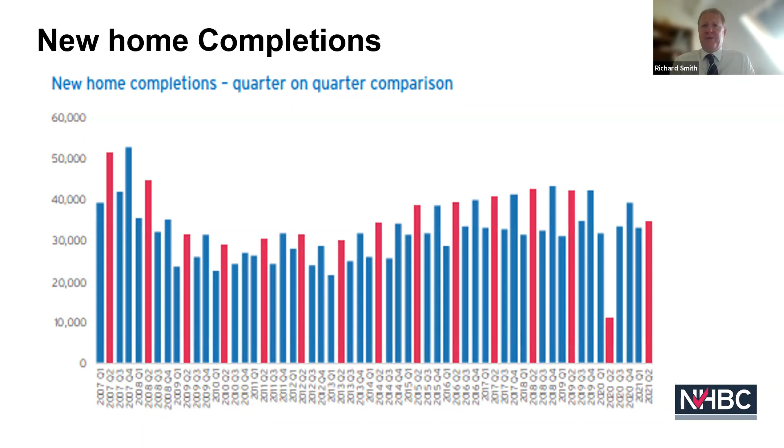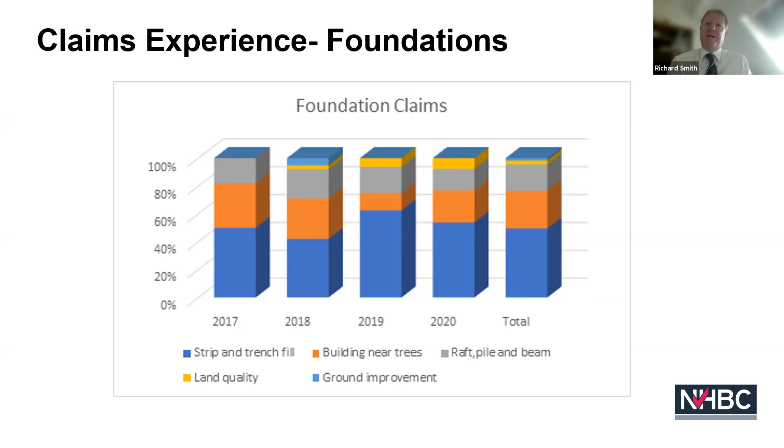But if we just move on to the next slide, I'd like to spend more time talking about our claims and our claims experience with buildings. Thankfully, I can say we don't seem to have a significant claims loss with foundations and foundation systems, but we still get some claims. Statistically, splitting this down between 2017 and 2020, most of our claims come from strip and trench fill foundations or building near trees. We do receive some claims on raft, pile and beam systems, land quality, and ground improvement, but they are very, very few and far between. So it's the traditional building systems or foundation systems, and also building near trees, where we actually receive the notifications. Just to say these are notifications we've received rather than actual costs. If we move on to the next slide, we'll now talk about costs.

So if you remember on the last slide, we looked at strip and trench fill foundations as being the largest notifier of claims. But from a cost point of view, building near trees and remediating those issues is probably more expensive over that same time period. Just to clarify, that's down to the fact that the foundation systems are more complex and probably more complex to resolve, whereas an issue with a strip and trench fill foundation may not always necessarily rely on an underpinning solution. A solution for remediating foundations near trees may include a pile raft reinforcement type system, which obviously increases the cost significantly. Just to also mention, in recent claims we've seen a good example where the foundation depths were what we would deem adequate, but the heave protection was missing, so there was potentially a risk of heave in that building. But generally what we see is that our standards in relation to building near trees, if done correctly, are appropriate for the risk.

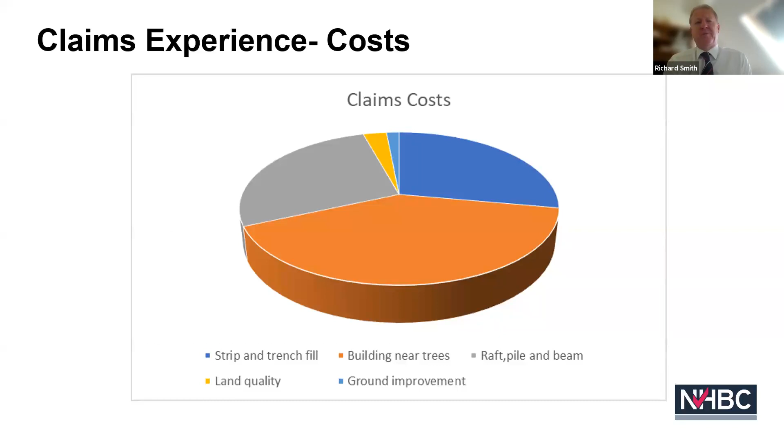It's something that we want to look at as we move forward. So if we move on to the next slide.

So just to talk about what we are doing at NHBC to look at foundations. For a start off, we are committed to supporting changes to prevent further climate change and resilience to climate change.

We have previously produced an NHBC Foundation publication on designing efficient piling systems for low-rise housing, and that was done a number of years ago now.

What we have agreed to do now is we have commissioned a new NHBC Foundation publication to look at the effects of climate change and how that will affect foundations in the future.

We've started on that. That will involve a technical review, which, if anyone is interested, please contact me, and we can put that over to our authors, and we can get that out.

But I think getting the information across to actually do the survey so we can find out the scale and develop that would be really good.

From there, the idea would be that we look at what that foundation report is telling us, to see how we are going to put in future standards for NHBC to support climate change, and look at how we can improve our resilience to climate change and risk of movement within foundation systems.

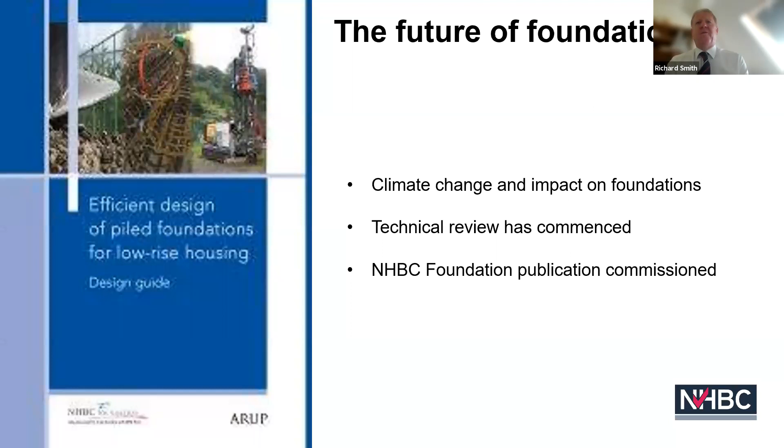So as we move on to the next slide, as part of our climate change agenda, we recognise that more trees will be planted on sites.

And we support that. I think it's very clear to say that we support that, and we recognise that that is part of a good sustainability agenda.

We also recognise that some local authorities, High Wycombe for example, are already starting to put planning conditions in about the percentage of tree canopy on building sites.

But that also represents a risk to NHBC. And with respect to that, we have to look at how we are resilient to that risk.

So rather than NHBC saying that we do not support trees, additional trees and tree canopies or enlarged tree canopies going on sites, what we'd sooner do is work with the industry to look at how we can mitigate that risk and reduce the potential risk of buildings becoming at risk of subsidence.

Based on the fact there are more trees there, we have offered some support to the Trees and Design Action Group, and we are happy to contribute to their technical publications. We have contributed some financial support on that as well.

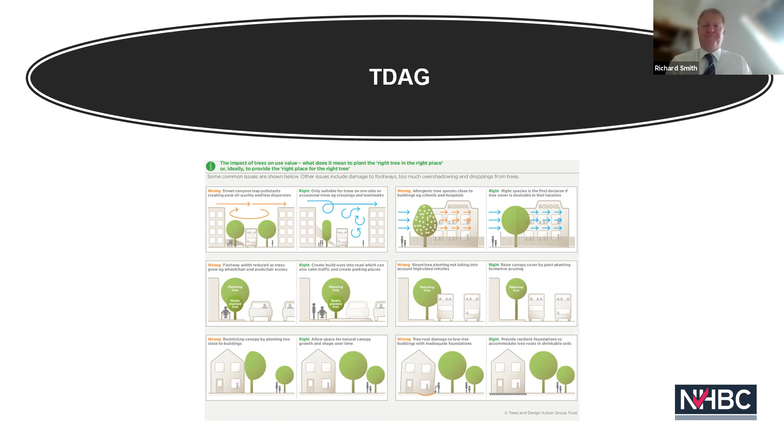Next slide, please. So probably one of the most interesting areas for today is the foundation depth calculator. We don't have any immediate plans to change the foundation depth calculator as of today.

But hopefully you can see that with the research we're doing as part of our NHBC Foundation publication and the work we're doing with TDAG, one of the outcomes would be that we look at our standards in general terms, chapter 4.2, and look at whether we need to make changes to improve our resilience as we move forward, especially with climate change.

We recognise that shrinkability or plasticity of clay varies significantly throughout the UK. The south and southeast are more at risk of shrinkage and movement in the clay.

But we also recognise that with potentially dry summers and wetter winters, the research we want to carry out hopefully will tell us what impact that will have on potential foundation systems.

And the other thing we need to look at is the fact that at NHBC, we need to consider the embodied carbon of foundation systems.

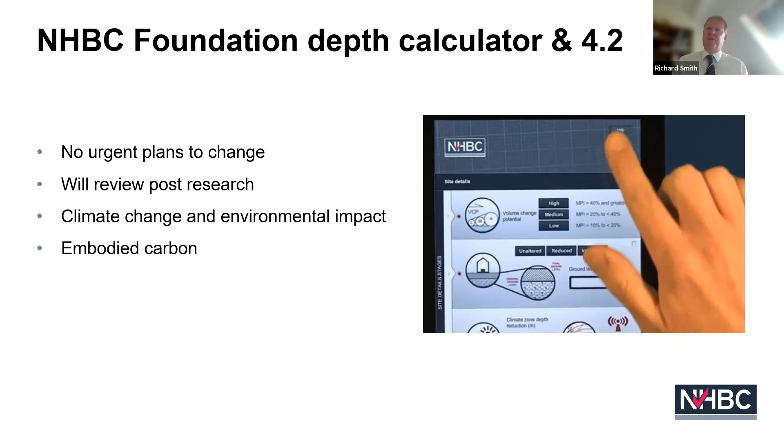Moving on to the next slide. The key thing for me is we haven't really had, in my experience, much of a relationship with the Subsidence Forum, and that's why I'm glad I'm here. But we do recognise that NHBC Standard 4.2 is used for remediation schemes and underpinning schemes. I'd say here that NHBC Standard 4.2 is a standard to demonstrate compliance with NHBC requirements for new build housing. It was never produced or prepared for anything wider than that, as far as I'm aware.

But we do recognise that it's used by the wider industry. From an NHBC point of view, I've got to make it clear that I don't think that was ever the intention, and our priority will always be to create a standard for providing resilience to potential claims and consumer experience in new build housing.

So what I would say though is that I am happy for the Subsidence Forum to be involved in any future committees we set up in relation to developing future standards with respect to foundations, particularly standard 4.2 and foundations near trees. So that's probably an open invite to the Subsidence Forum to get involved, and I'm more than happy to obtain feedback from the Subsidence Forum to help develop a good standard.

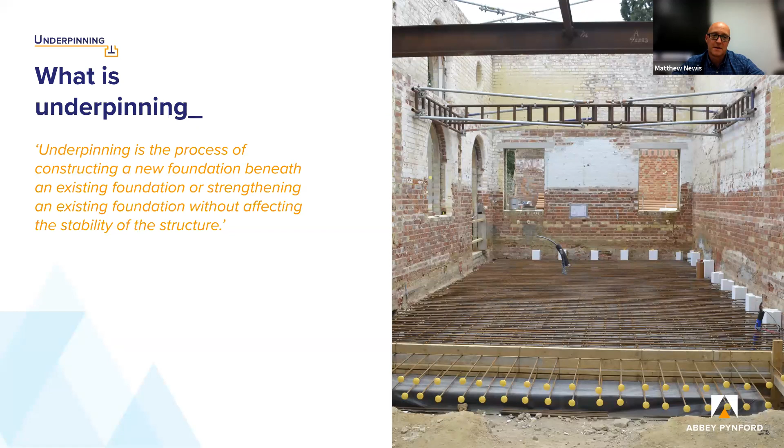Construction of piled raft. We often get asked, what are you actually doing to our house? We have a basic description: in simple terms, we're putting a building on a concrete table, which is the raft slab, with concrete or steel legs. That gives the owner a picture of what we're doing. It's most appropriate for whole buildings or extensions if we can - it's good to pick up a whole building.

It's more cost effective than traditional underpinning, and the raft slab also doubles up as a new floor structure. We can use it for anti-heave, and it's easier to adapt and adjust. The downside, to be honest, is the disturbance - the whole inside of the property gets stripped out, so the property needs to be vacated when we carry out the works.

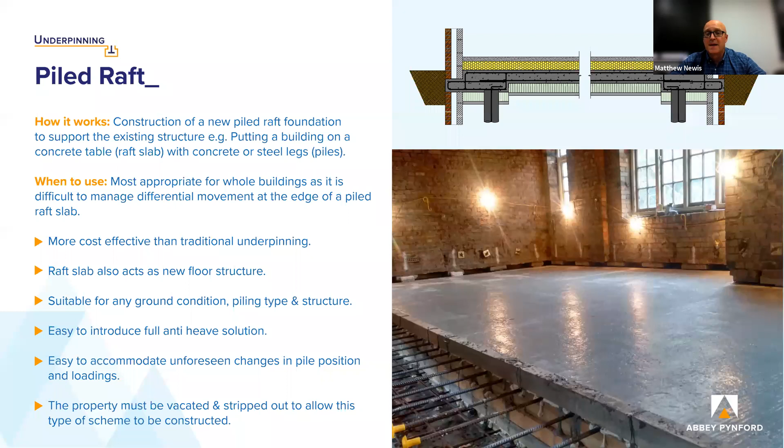I'm going to run through the process. Generally, we work alongside a general building contractor who will strip out the property and protect it. They'll take out all the fixtures and fittings on the ground floor. Sometimes, if there's something that needs to be kept, we'll work around it and build underneath it, but ideally the whole ground floor gets stripped out, including non-load bearing partitions, and the existing floor gets removed and reduced - sometimes undertaken by the main contractor, or sometimes ourselves.

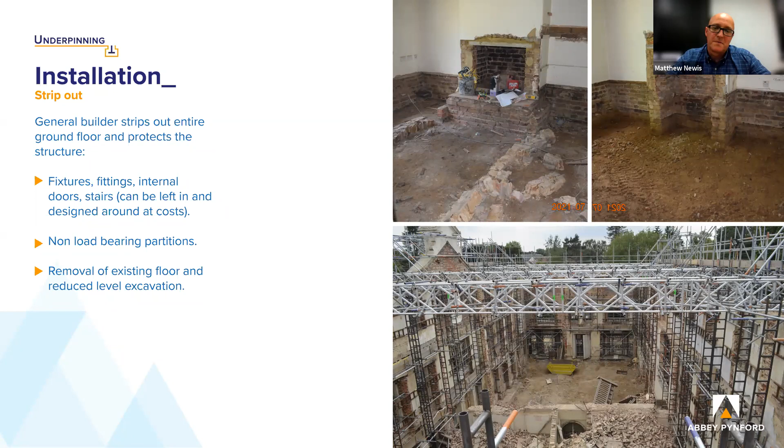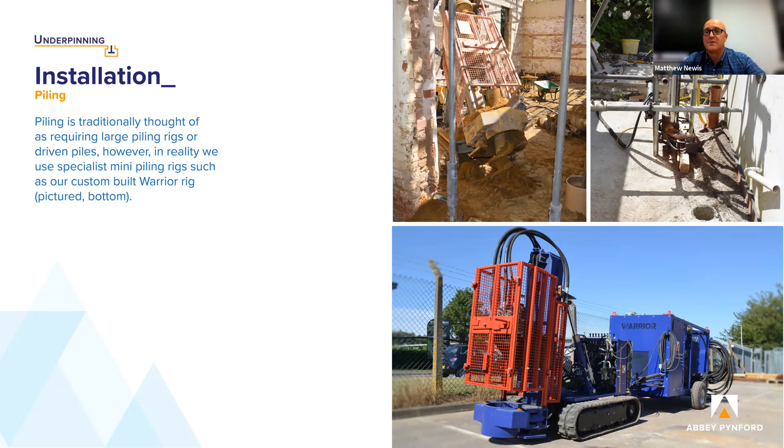The first thing we carry out generally is the piling. When you talk to people about piling, everyone thinks about the big piling rigs you see on open sites. The first question I get asked by the homeowner is, how do you get one of them into our house? What we do is bring in a much more scaled down version, similar to the rigs in the pictures there, or similar bits of kit. There are two pictures showing augered rigs, and in the top right hand corner there's a handheld kit set on scaffold to install micropiles, which I'll talk about later.

Here are pictures of piles installed at different stages. Usually the pile comes out just above ground level - we use cardboard sleeves to build them up, and the reinforcement projects out the top, which is then bent down and put into the raft slab.

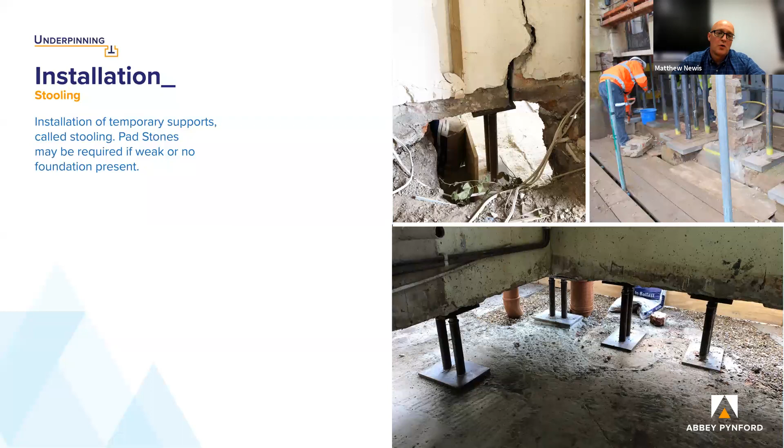Once all the piles are installed, we'll support the building on temporary stools. These continue to support the building through the existing foundation whilst the raft slab's installed. On some occasions, the foundation might not be deep enough for us to stool off of it, so we may insert temporary foundations below or use pad stones.

Once it's stooled up, we'll put the blinding in - usually sand or concrete. Concrete's used if we've got no anti-heave precautions, or if we're using polystyrene products such as Pecafil or Cellcore. Sand is generally used if we're using collapsible materials such as Heave Guard or Clayboard.

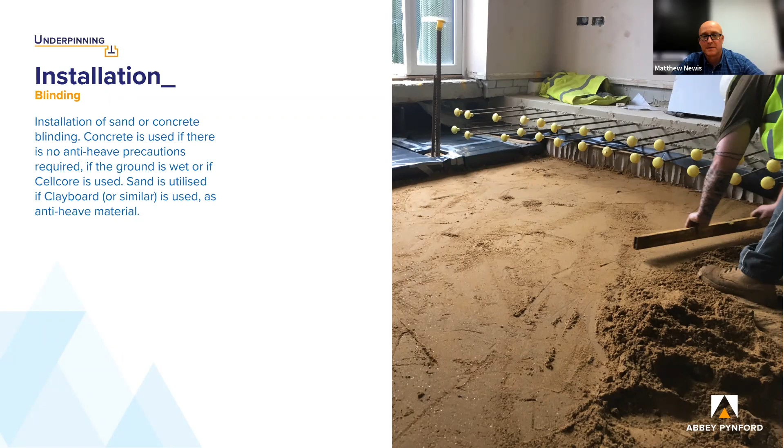Depending on what we're using, the Clayboard material is actually made out of cardboard. We wrap it up in its dry state, all wrapped up, and it can support up to a metre's worth of concrete above it. We install that, install the concrete, and afterwards introduce water into it, which allows it to collapse and create a heave void underneath. The polystyrene products work slightly differently - they are compressible, and if the ground heaves, they're designed to compress. They require the pile connections to be a lot stronger, and the piles are designed accordingly to resist that uplift.

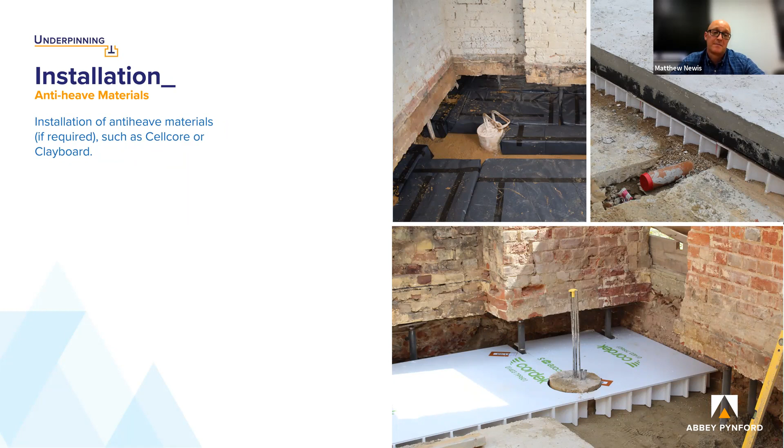Once we've got the anti-heave in, we'll install the reinforcement. The reinforcement is placed in, and then prior to concreting, we'll have quality control checks, generally by our contracts managers, by building control, potentially checking engineers or the clerk of works. As we're members of ASUC, we'll also potentially have design engineers that check on behalf of ASUC to come in and have a look as well.

Once we've got the reinforcement ready, we'll pour the concrete. Generally we need access to either get a concrete lorry up to the site or we'll pump it. Once the concrete's all installed, we'll allow it to go off.

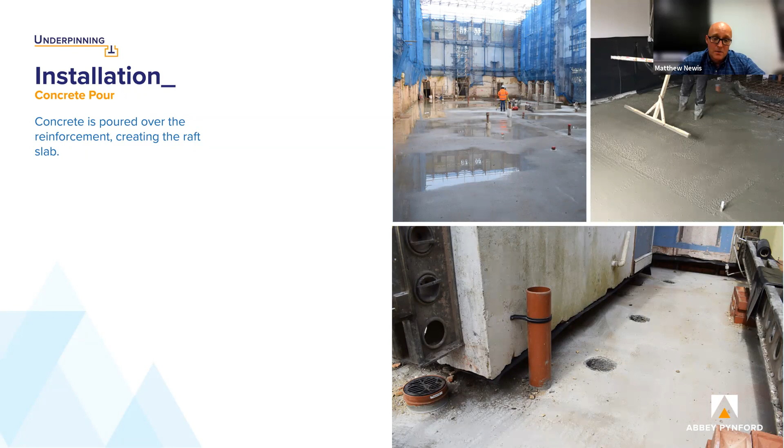We'll allow the concrete to go off, and then after 7 days we'll look at whether we need to take the temporary stools out. So we take the stools out and the holes are made good. In the process of removing the stools, we have further quality checks to make sure they've all been removed, and then the building at that stage is separated from the existing foundation.

On some occasions we may need some bricking up done, as in the lower picture. So the slab's installed. Before we take the stools out, we'll either dry pack the gap between the existing structure and our slab, or if it's over 75 millimeters, we'll get it bricked up.

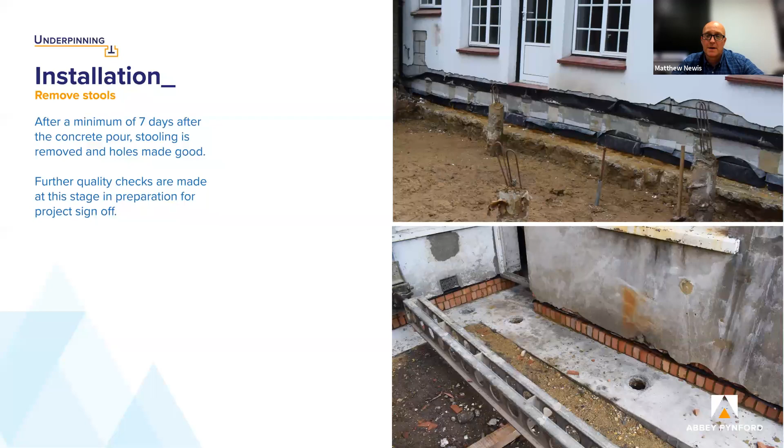I've got a couple of case studies. The first one, on the next page, is a large property that we did in North London. This property had been previously underpinned and piled, but was still moving quite considerably.

So we prepared and provided quite a detailed scheme that had some quite complex temporary works, which allowed us to take out sections of the existing scheme so we could put a whole new scheme in.

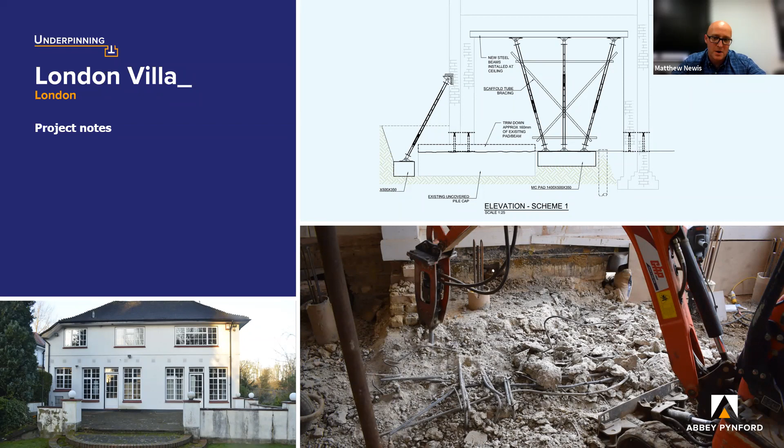The piling rigs, as I said, are designed to go in the building. As you can see here, they'll fit through doorways, they'll fit through a domestic doorway. By the time the floor's removed, they've got sufficient height to operate without damaging the ceiling, etc.

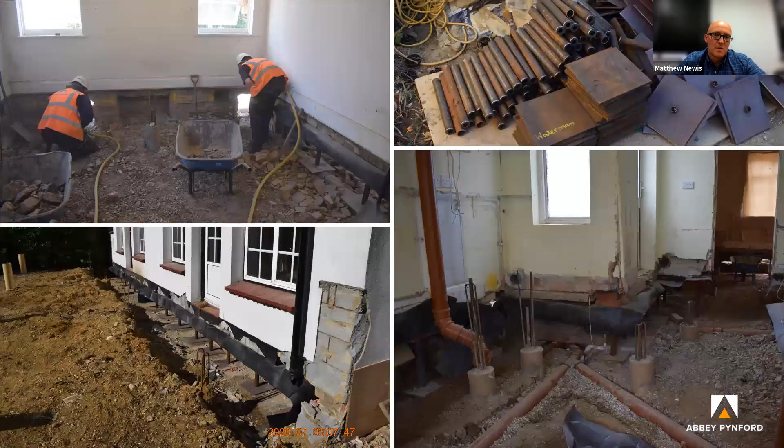As they work through, the guys then stool up the building, breaking out bits of the existing structure and putting it all on the temporary stools. Sometimes we have to take the drainage out and put it back in again, depending where the piles are going, and on another occasion it might need to be moved or combined within the actual scheme that we're installing.

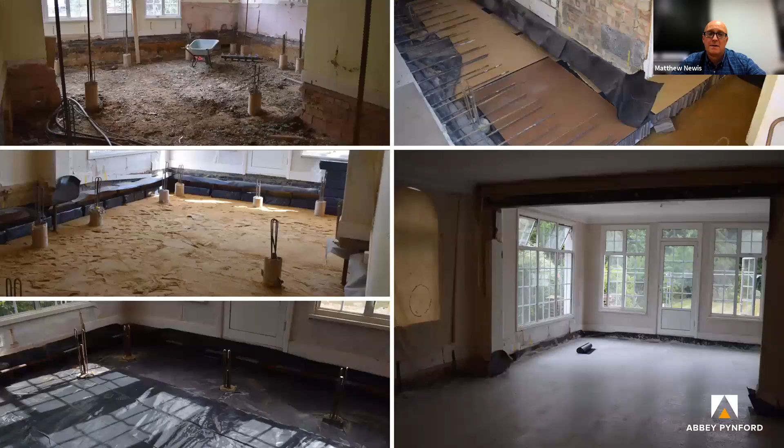As we progress through the works, piles are installed, then the blinding, the anti-heave precautions all wrapped up, and then the slab is finally installed. That was a traditional scheme we did, which was down to clay shrinkage.

This project was a new build property that we had to go in and pile. It was timber frame, so that threw up its own issues regarding how to support the timber frame. We came up with quite a novel approach, and we installed lintels underneath that entire frame with our props to ensure the loads weren't point loads being put into the sole plate.

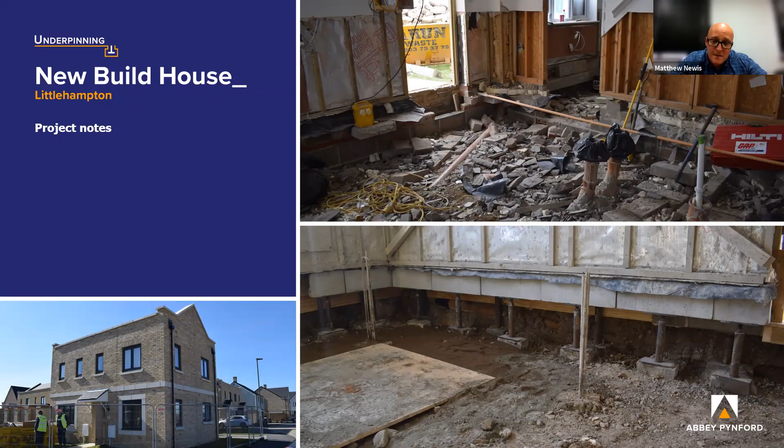On this scheme it was a non-voided scheme, so we didn't have to put the anti-heave precautions in. So the stools actually get cast in and are sacrificial.

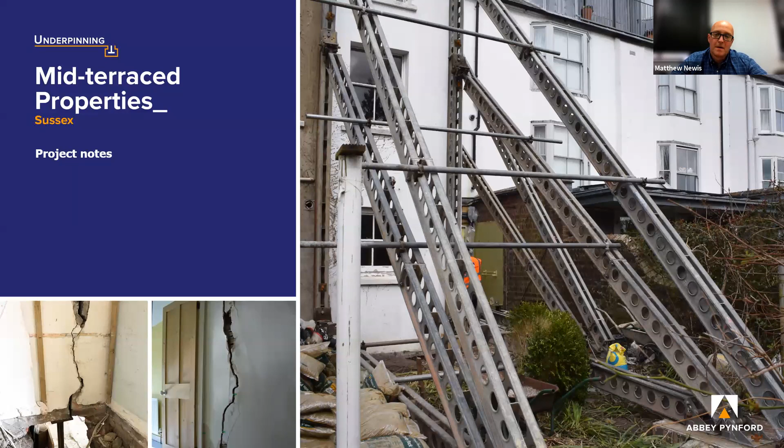We actually stooled the slab up, stooled the building up off of pad stones and off temporary pads, and then installed the raft slab first. Because the property had such a shallow nominal footing, we put the whole raft slab in first, and we left openings in the slab to allow us to install the piles afterwards.

Okay, go to the next page. This is a slightly different project for us.

This was for a house builder where we stabilised not only the existing structures, we also installed pile rafts for new foundations over some of the buildings. It shows that we can do not only single storey, two-storey standard domestic properties, but we can engineer to take up much larger structures. So we underpinned not only the manor house here, we underpinned the stable block and the clock tower as well, using similar techniques, just with thicker slabs, larger diameter piles, and more comprehensive stooling techniques.

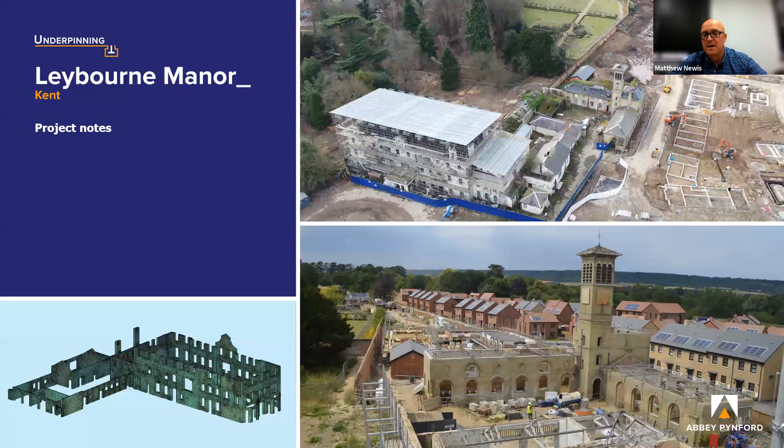So we picked up the manor house, which is in the bottom left-hand corner. We picked up the stable blocks, and we picked up the clock tower with pile rafts. We also did some facade retention and mass concrete underpinning to the listed wall at the rear. And the new homes at the back of the site, we also put in our HouseDeck system, which is a piled raft for new build properties.

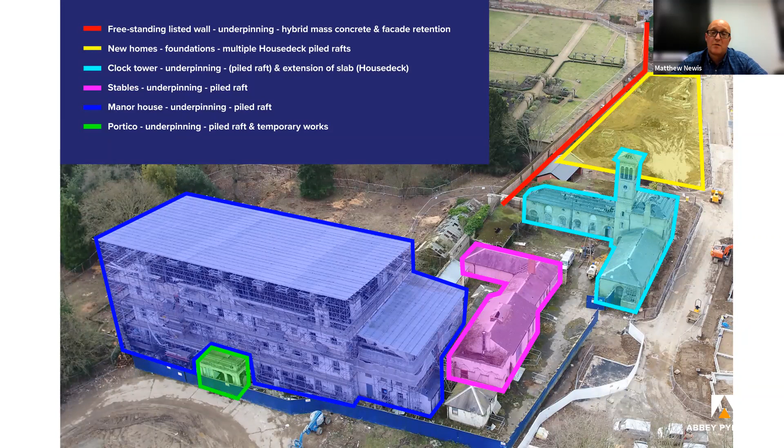So in the manor house, we stooled it up. We put quite comprehensive stools into some of the areas, which comprise large steel sections on temporary pad stones. The main contractor did quite a lot of temporary propping to hold the structure in place.

And as we carry on, we picked up the clock tower. This was a very large, heavily loaded structure. But our design team did FE modelling on it, looked at it, and came up with a solution that worked, that provided the house builder with a new foundation, so they could convert this.

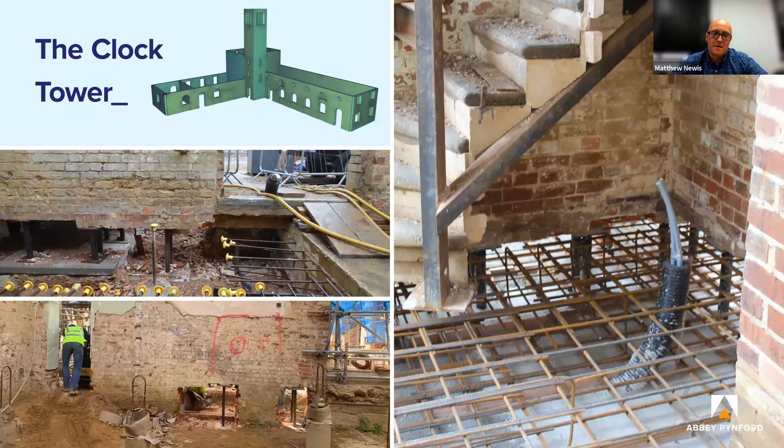So we carry out a lot of our own designs. Piling has come a long way in the last 15 years. Before, piling rigs didn't have the big red cage that you see there on the front, whereas now we do. It makes it more difficult in terms of where we put our piles. Doesn't mean we always have to have that guard on there, there are ways of working around it, but we have to make exclusion zones. Predominantly what it's done is made it so we can't work as close to the building as we used to, so we've had to redevelop our designs and reconsider what we do.

What you'll find is most underpinners design and install their underpinning their own way, they all have little nuances. Quite a lot of the time, clients go out to engineers to get these designed first. Generally, if you don't involve an underpinning contractor that knows how close you can put the piling rig and what the problems are going to be, the scheme ends up getting adapted and redesigned at that stage. So a lot of our work we do on a design and build basis - people come to us with a performance specification and we work to that. I think a lot of the time, if the engineers don't involve us, you could spend quite a bit of money that's going to then need to be redesigned anyway.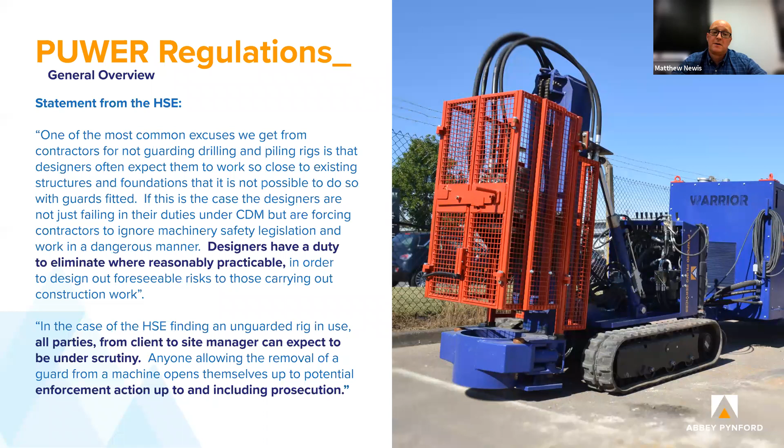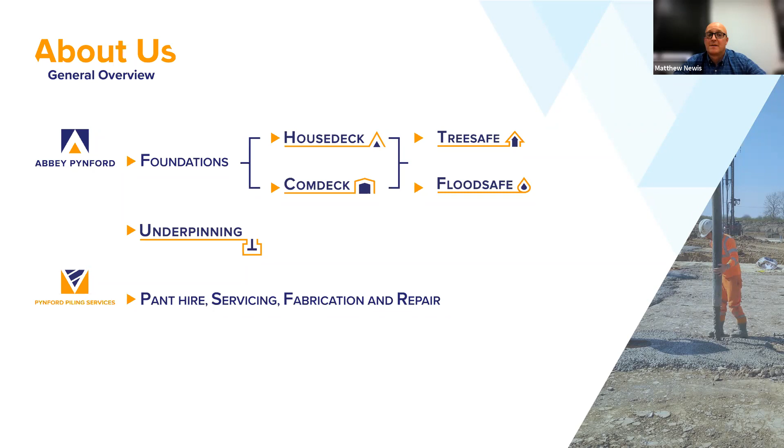We're IMS accredited, our systems are BBA and LABC certified. We have CHAS and SMAS accredited Constructionline, and our systems are NHBC and Premier Warranty approved systems - that's generally our house foundation systems.

We've worked for a lot of people. We do a lot of insurance work, and a lot of work for house builders and their ground workers. We get involved with as much as we can. We have our in-house design teams, so we do all our work in-house, including FE modeling - we've done some quite complicated and detailed things in the past. We use a lot of 2D and 3D software, like SOFiSTiK, to do our designs.

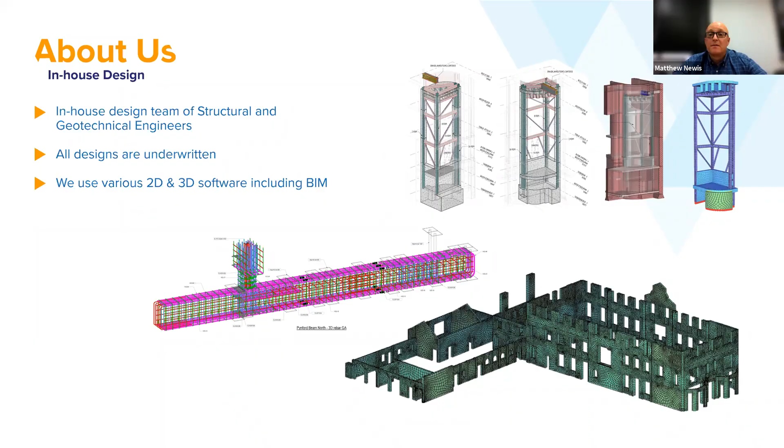So that's the end, thank you very much. I'm happy to answer any questions.

Thanks, Matthew, that was really interesting. Loads of great photos there, which I'm sure has given everybody a little insight into what it actually looks like on the ground in a property being underpinned.

I've been checking out the chat box and the Q&A box as you two have been going through. Richard, if you want to come on your camera as well, because I'll start with some questions to you, if that's okay. Yeah, can you see me? I can see you, yeah. Yep, all right, hang on, let me just scroll back to the beginning of the questions there.

So from Giles Carter - he noted that it was never the intention of the NHBC that Chapter 4.2 would be adopted by the wider building control and subsidence market, but what alternative design guides could building control and the subsidence market rely on, in your opinion?

Okay, so what I would say is the best route for any foundation system would be to be engineered designed. So I would say that is the preferred route - to go down an engineered solution rather than a set of standard design guides. I'm aware of ours, and I believe LABC may have a foundation depth calculator as well, but that is the general approach - that would be a design solution.